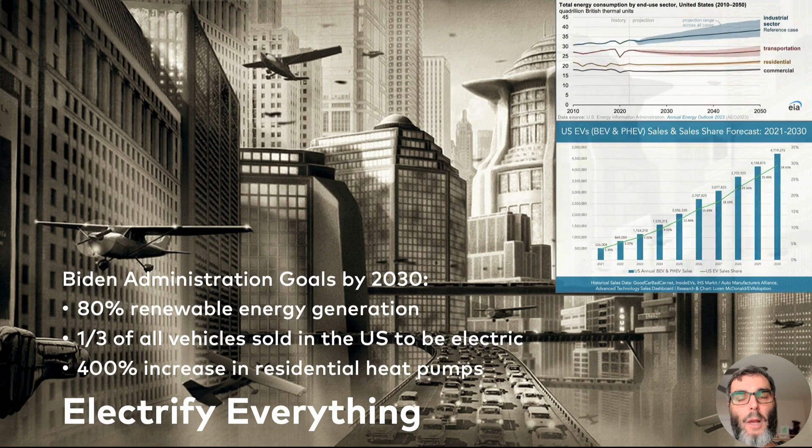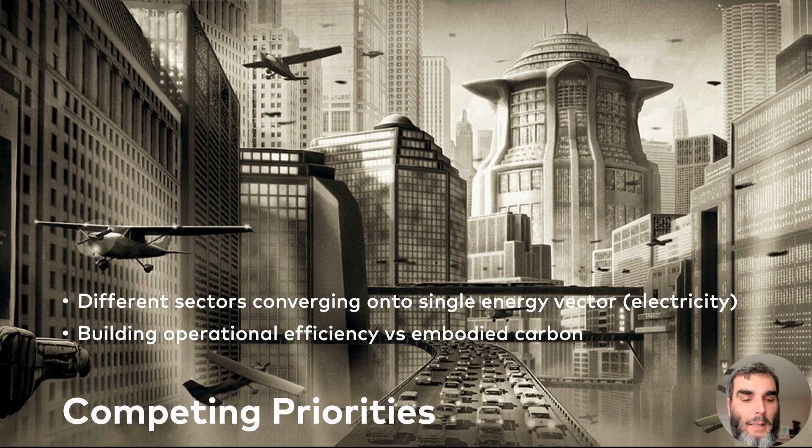And at the same time, we have some priorities that are competing with each other. We see different sectors converging to the same energy vector, that is electricity, as well as we see competition in the world of construction where embodied carbon and operational carbon seem to have conflicting priorities in trying to minimize the impact of buildings. And lastly, are buildings actually getting better with this technology?

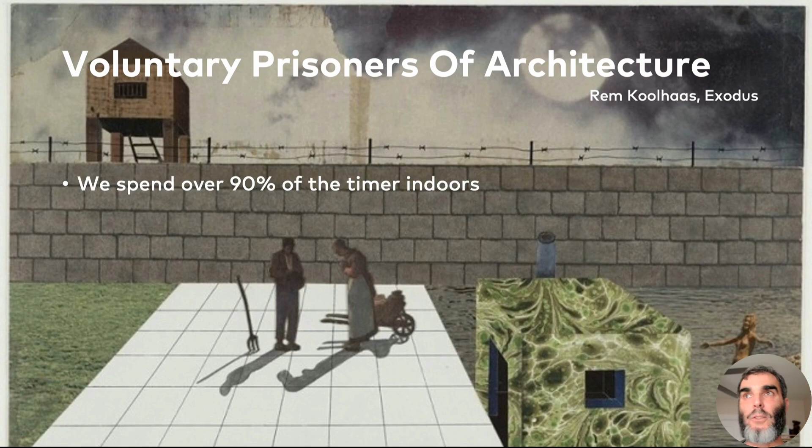So, one of my favorite quotations is from Rem Koolhaas, an architect from Holland. He used to call people voluntary prisoners of architecture. And that's because we spend 90% of our time inside buildings. And the buildings we live in naturally have a very strong impact on our health and well-being.

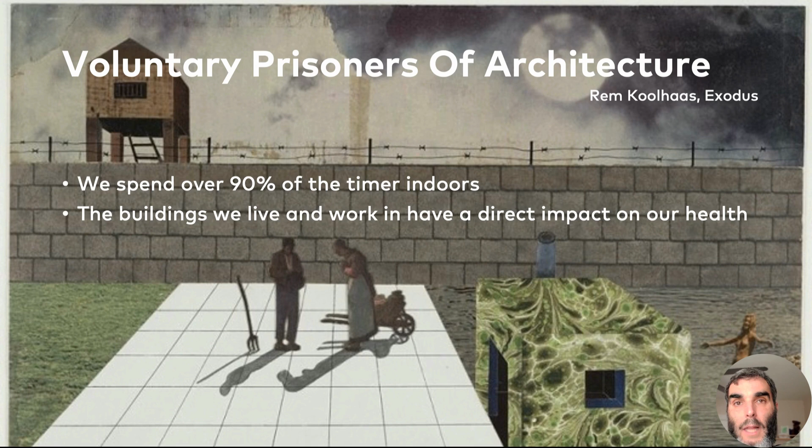That being said, this is something that we ask builders that take our training all the time. How long do you think a family stays in a house that they just moved into before they move out again? Think about that. Most builders that come and take our training think 3 years, 5 years, some think it's 7 years. And the reality is that on average, that family is going to stay in that house for 13 years before they move out again. This is the number of years that a family stays in a house today. And it has been 13 years for the past 10 years.

So this is part of the building science. If you're making recommendations to your client based on your knowledge, you should also have realistic expectations of how long they're going to be in that house before they move out again. And that number is 13 years.

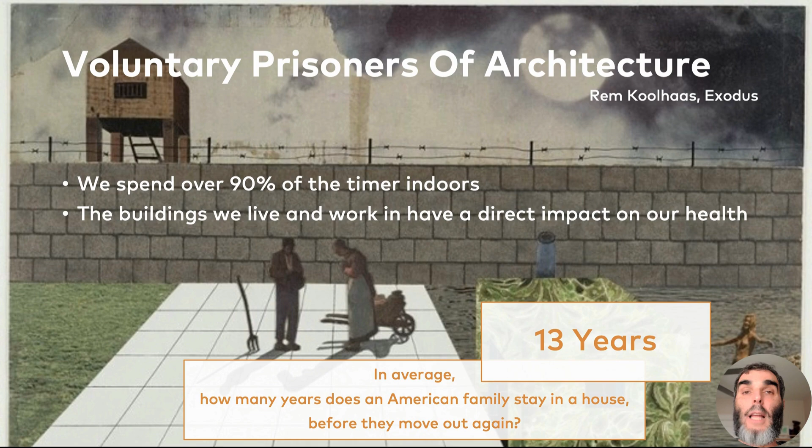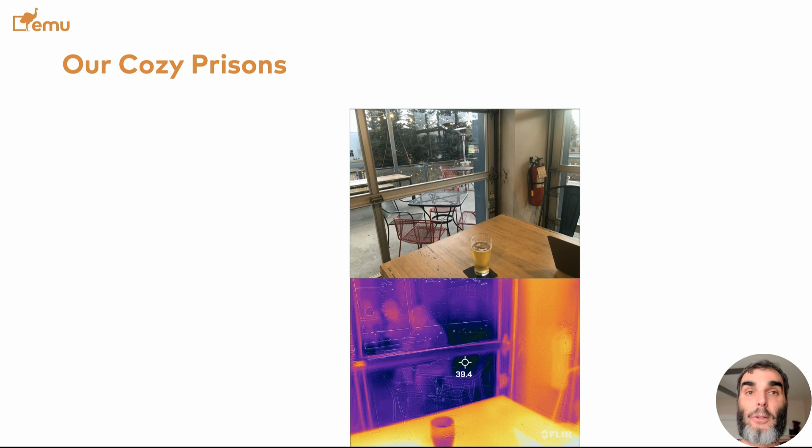And they literally lost business because I love beer and I would have had a second beer at least. But that day it was so cold that I had to go. So they lost business because the clientele was uncomfortable.

And this should not be a competition. Buildings should become healthier as they are becoming more energy efficient. That is one of the goals that we should have in any approach that we have towards buildings.

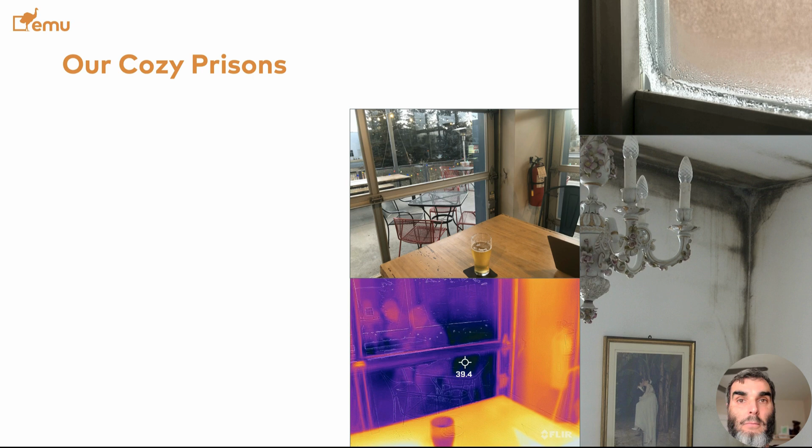So just to give you an idea how accepted it is in the US that windows are going to have condensation. Windows are going to have ice forming inside of them. This is normal for professionals designing, manufacturing, and building windows. Keep that in mind.

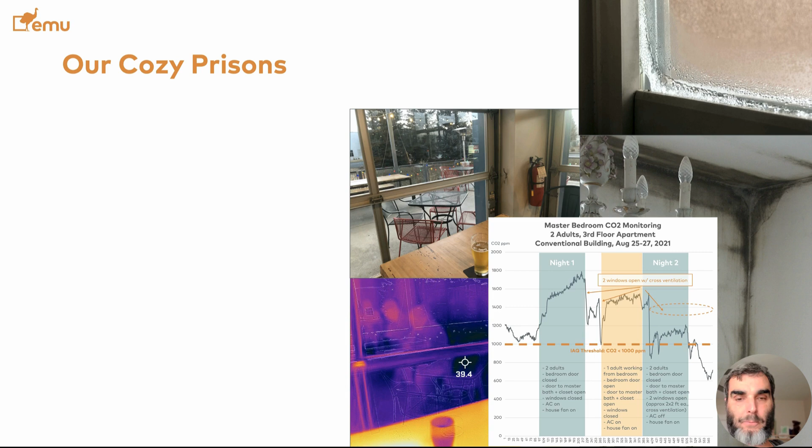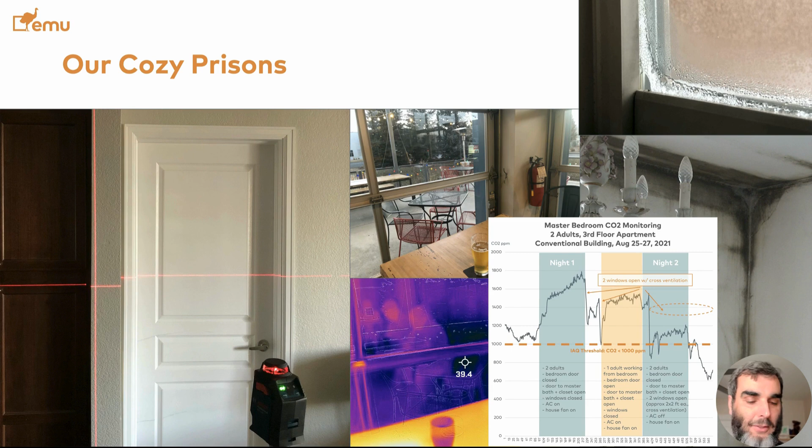And lastly, the same building, I once shot the laser level, and I found that wall on the left-hand side to be off plumb by 3/4 of an inch. So my expectations suddenly dropped, and I moved out. So that is a real-life experience of what it is to live in mainstream construction buildings today.

Now on the market we have basically two extremes. One is the worst building type that you can legally build, and that is a building built to the code minimum. That is represented here with the 2021 IECC building code minimum. And then on the other end of the spectrum at the top, we have passive house. Passive house buildings need about 80% less heating and cooling compared to regular construction. And those are the two extremes that we typically see in the market between code minimum and passive house.

Now, in between, we see a lot of better than code building, or my building is 20% better, or it's high performance. These are all definitions that oftentimes don't have a real justification because they don't actually abide by a set standard, or they don't actually have ways to measure that 20% better. It's just a number that an architect or a builder may pull out of the rear end to have a better grip on the clientele.

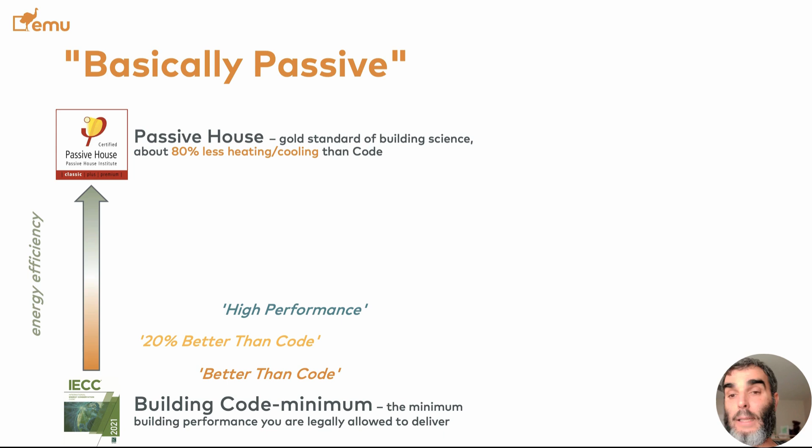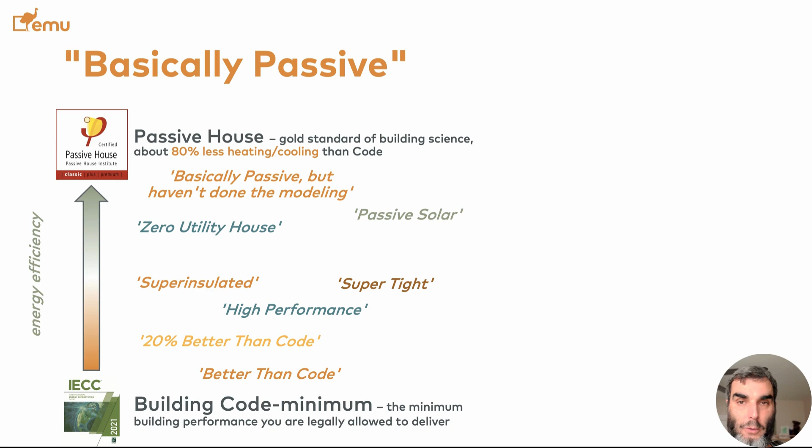We can have a super insulated building. We can have super tight, zero utility house, or questionable. It's passive solar, that is some very old concept. Or it's basically passive, but haven't done the modeling. So you have not done your homework and you don't know, really. And these we call the floaters because they float in between code minimum and passive house. And there's some risks associated with that.

To start with, the expectations are undefined. What does success look like in a conversation with your clientele if you're not defining your goals clearly? If you don't define your goals clearly, that is very, very risky in any conversation. Then you have the risk of overpromise and under-deliver, and that leads to disappointment and frustration. It can be overkill. You can end up overpaying for the amount of insulation, the type of window package that you order, or it can be under-delivered, especially in the indoor quality, but even the construction quality.

Missed moisture management, so thermal bridging, the issue with mold that we saw in the previous slide, that's an issue with moisture. And then lack of structure and guidance. What are you actually trying to do with this project? So these are all issues that we see over and over with projects that don't commit to full passive house, but they want to try to do better than code. It's very gray and fuzzy and unclear what these projects are trying to do.

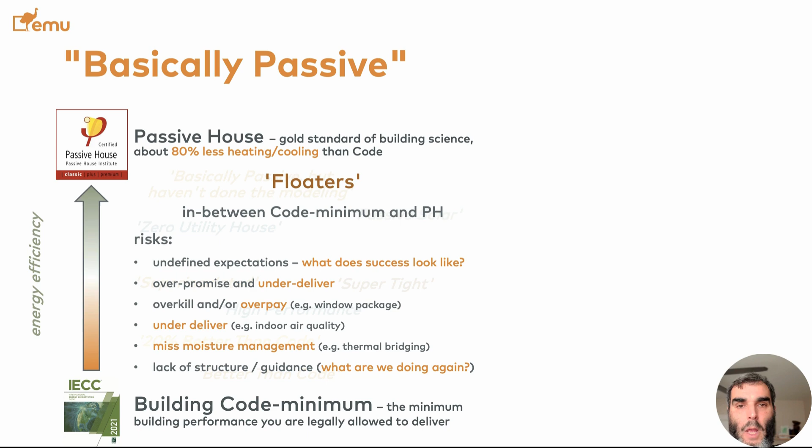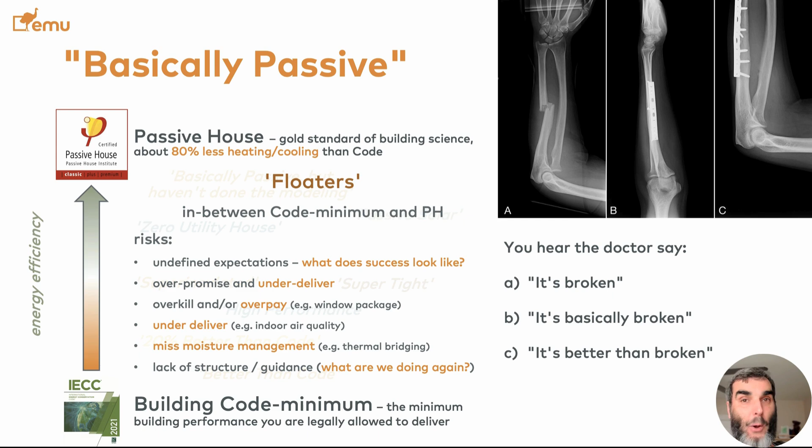Think of it as you're going to the doctor because your arm hurts and you're trying to get an answer from the doctor that is visiting you, and the doctor says it's broken, or it's basically broken, or it's better than broken. So it sounds ridiculous, but that is what construction is at right now. We want to have that diagnosis, to have a clear understanding of what's going on. And better than broken buildings are risky.

In a newly built home, what percentage of the total heat loss do you expect to see from exterior walls? Or for windows, what percentage? Do you expect the windows to be 50%, the windows to be 10%? This is windows without considering the air leakage, for example. What about air leaks for the whole house?

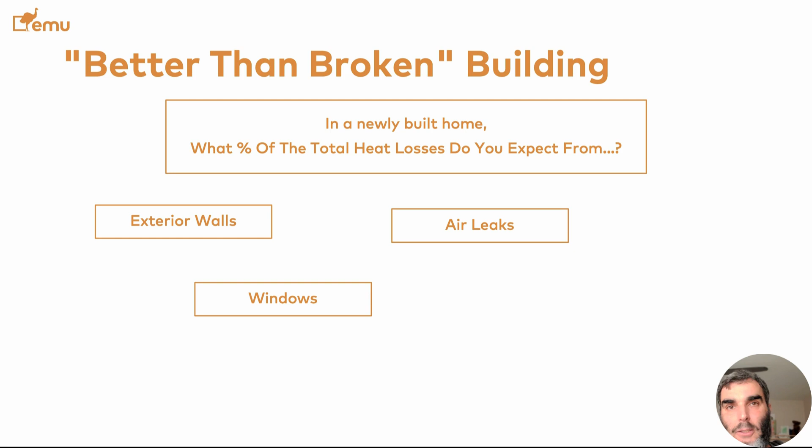That 0.6 air changes per hour that is for passive house, or 3 air changes per hour that is for code, or 1.1 air changes per hour that is for Phius projects. Is that 50% of the total heat losses? Is that 20%? Is that 15? Do you know? What about losses to the ground?

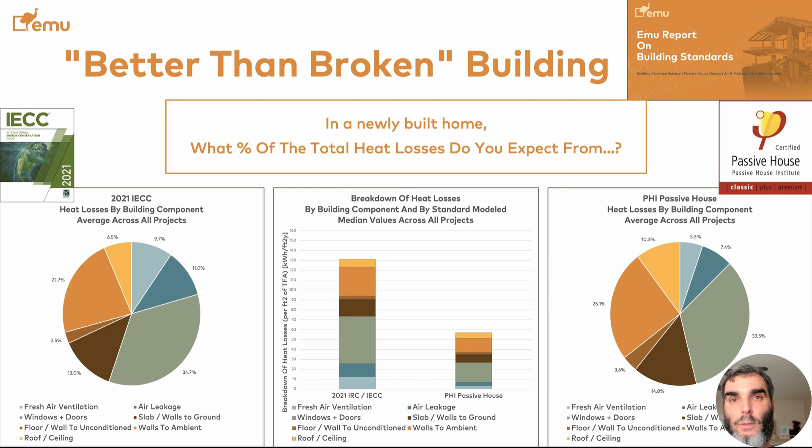Now, if we bring them to passive house, windows and exterior doors still count as the main source of heat losses. Exterior walls still count as the second one. Third is still heat losses through the ground to the outside. And then air leaks drop to number 5 in this scenario, with number 4 being, for passive house, the ceiling. Now, what is interesting is that when you compare apples to apples, passive house has a lot less heat losses in total, but the breakdown between windows versus walls versus air leaks is very similar to a code built building.

Now, informed decisions matter because every project has a limited budget, and the data that you get from an energy analysis helps you make decisions and make them based on your goals, whichever goals you may have, and whether or not you want to meet a certain green builder certification.

It's just a way to have a diagnosis, just like you go to the doctor and they tell you that your arm is broken. It's better than that than they tell you, oh, it's basically broken, but you don't actually know. So the moment you decide to spend more money, there's plenty of people that are willing to help you spend money, but you don't necessarily meet your goal that you have set for your project.

So in this scenario, we want to help you quantify how much A is better than B, and whether you do need B or if you're okay with C, whichever those A, B, and C may be. Maybe it's a higher performing window package, maybe it's more insulation in your building overall, maybe it is a heat pump. But if you don't know, if you don't have the data, then how can you make decisions? You just don't know.

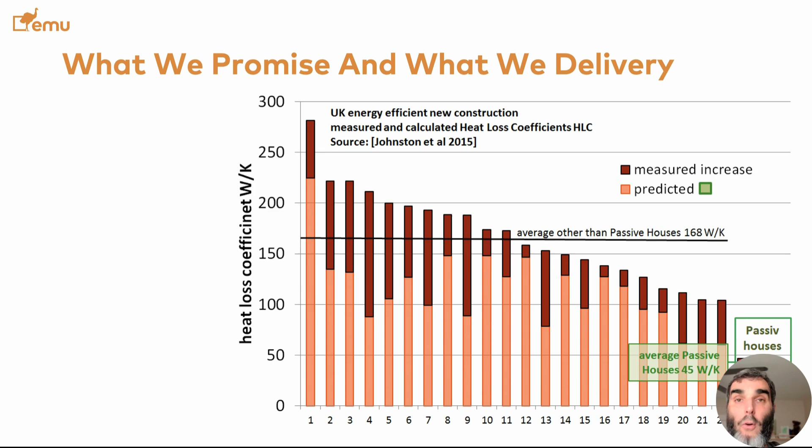What we promise and what we deliver. This is a study made in the UK where they looked at the actual performance of 25 built projects. And the pinkish columns show the expected or promised energy performance, so how much energy that building was supposed to consume for the overall operation.

And then the maroon darker red shows what the actual additional consumption was on top of the expectation, meaning that the buildings with a lot of darker red maroon columns were consuming a lot more energy than it was anticipated, and that is a sign of a performance gap. Performance gap is the gap between what you promise and what you actually deliver, and that is very common for code built buildings and even the floaters, projects that are built in between code minimum and passive house.

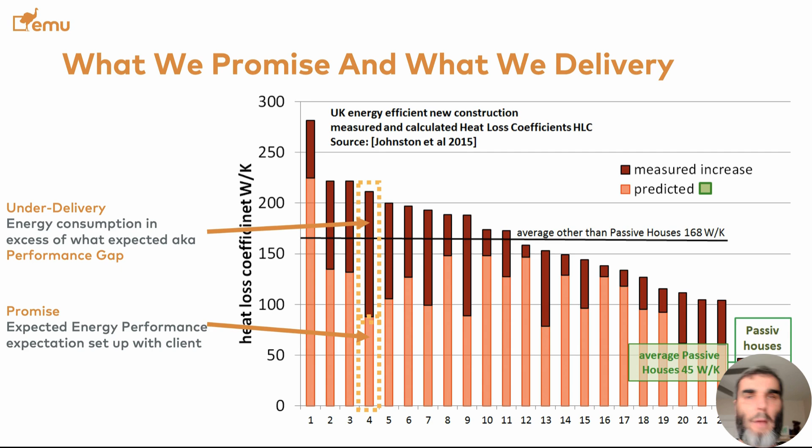If you don't have a very clear expectation, if you just say, "Oh, my building is super tight," my building is 20% better than code. You just don't know. And your building is doomed to be consuming more energy than what you expected and more energy than your client actually expects.

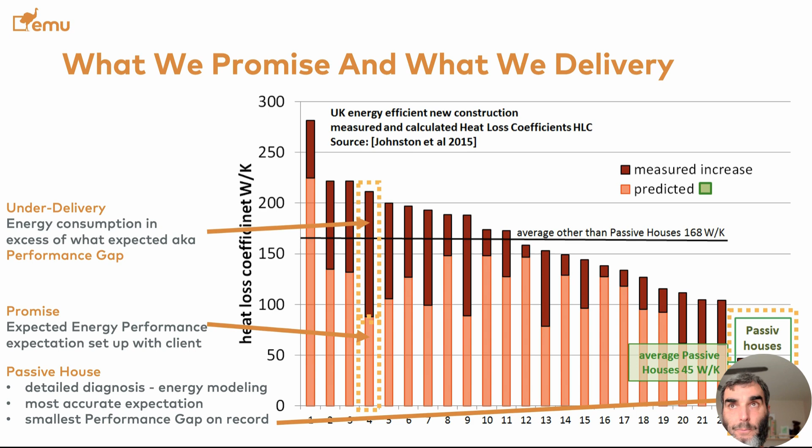Now, in this scenario, in the UK, they found that the buildings that were not only consuming the least energy, but also were being more predictable in how much energy they would actually consume were passive house projects. So passive house in this case not only helps you deliver a very high performance building to your clients, it's also a way to have a very dependable promise that you can deliver on to your client.

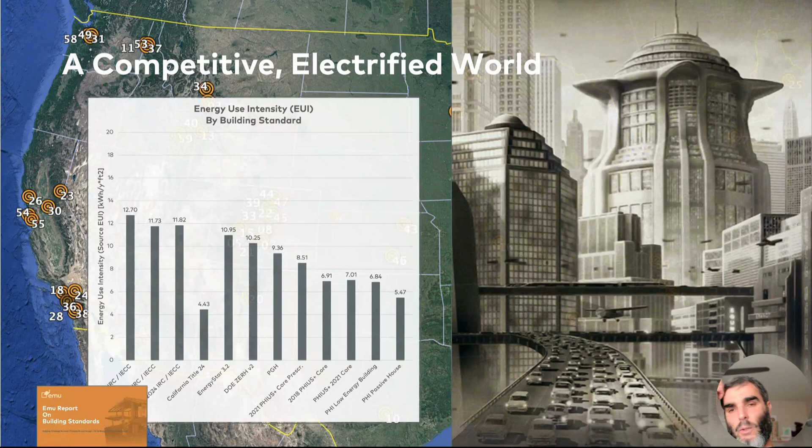This is the map showing the 50 projects that we analyzed and studied in the report I mentioned. And the study that we found was that once you start considering adding electric cars to the mix, you can have either a code built house or you can have a passive house and charge two electric vehicles for the same amount of energy that it takes to operate a code built building without charging any cars.

So that is a pretty informative piece of information, because if we look 5-10 years down the line what is coming, the buildings that we are building today are still going to be there, most of them, and we are going to be in an economy where electric vehicles are going to be common and commonly charged at home, and energy is not going to be cheaper.

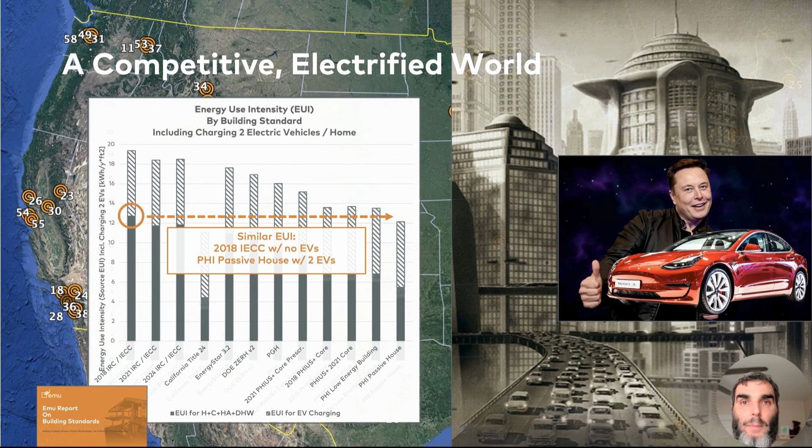So building your building to the passive house level, or offering passive house to your clients, is a way to future proof those projects and those buildings for an economy where electric vehicles are going to be much more common and charged at home.

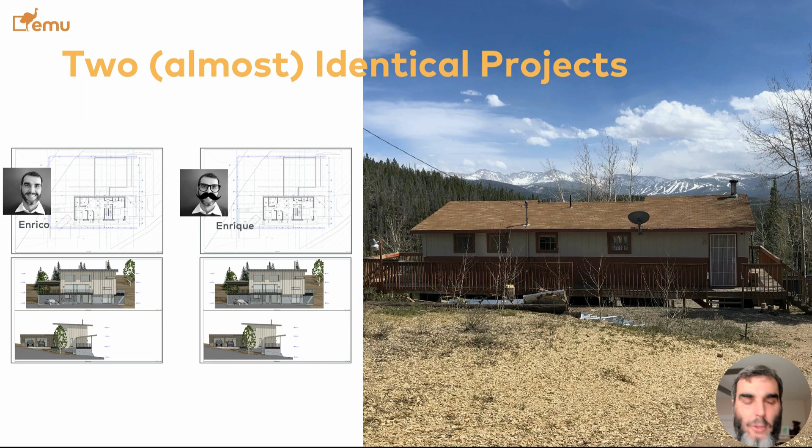So they have identical projects. This is my house up in the mountains, and I moved it to Boulder, Colorado for this experiment. But they basically have the same set of blueprints. They're just contracted to build. Enrico is contracted to build it to the actual passive house standard, and Enrique is just contracted to build passive house like, but without actual follow up on that.

And I moved the project to Boulder, Colorado, because this is a presentation I gave for the Natural Building Alliance conference in Boulder. Plus, Boulder is climate zone 5. It's more middle of the road climate compared to the actual location of this project that is at 8,800 feet of elevation in the mountains of Colorado.

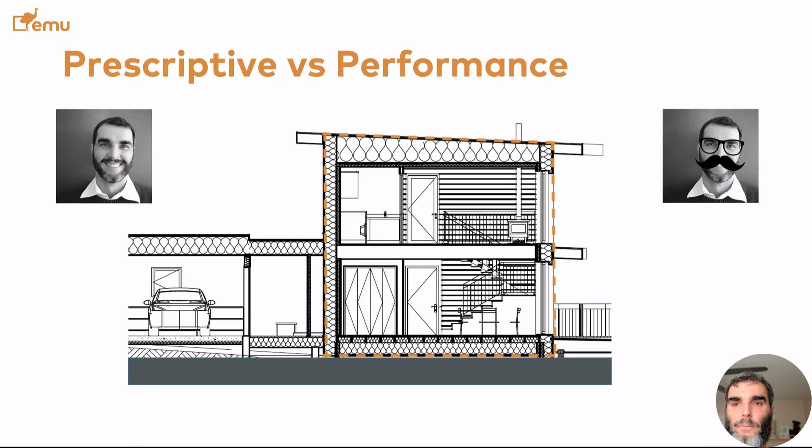So Enrico has a performance-based standard using the low energy building code, whereas Enrique uses the Phius prescriptive. In the study I mentioned, we compared these two standards pretty closely because we wanted to investigate the advantages of using a prescriptive approach versus the advantages of using a performance-based approach. So I'm going to have a slide towards the end where I can show a QR code where you can download the actual report and look at the results.

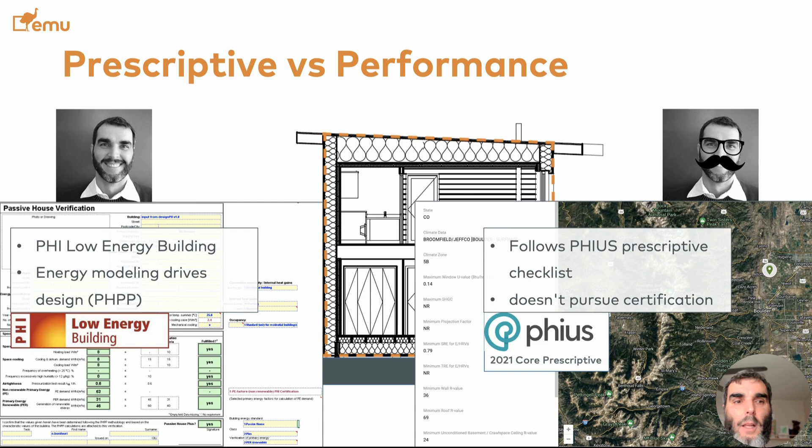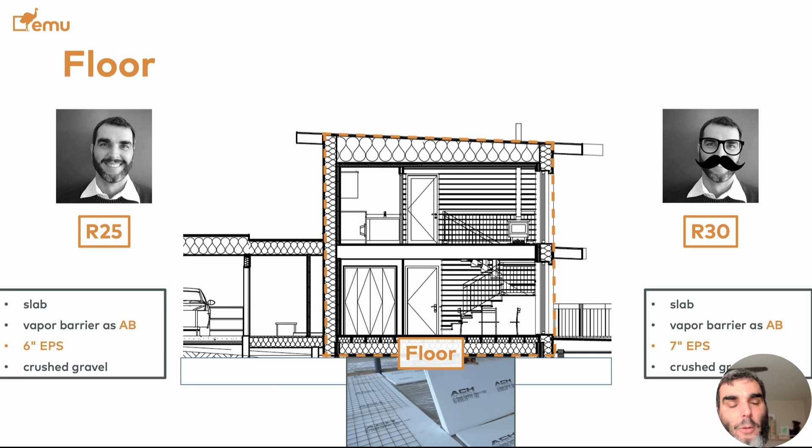So for the floor, we started off with 7 inches of EPS for Enrique, whereas Enrico had 6 inches. This is because Enrico was using the PHI low energy building, which is a performance-based approach. So he was able to shave off some insulation there and save some money, as well as saving some embodied carbon, for example. For the exterior walls, Enrique used 6 inches of mineral wool exterior insulation and an R20 dense pack cellulose in the 2x6 stud cavity framing.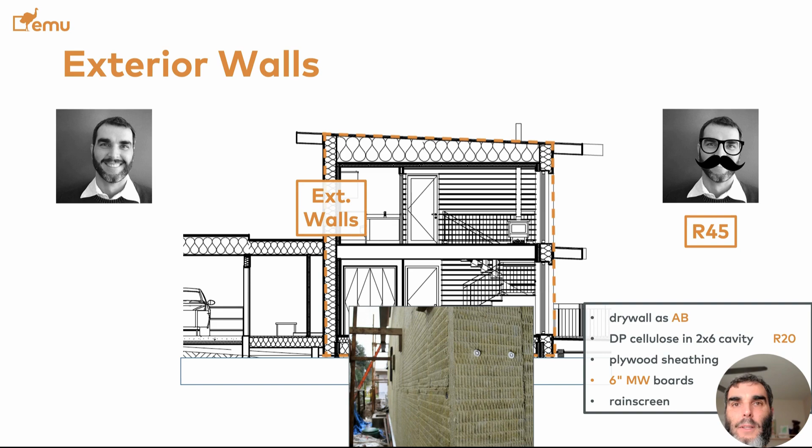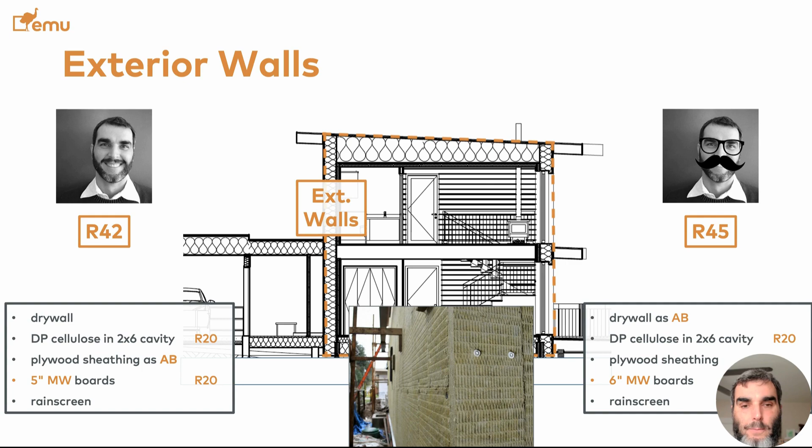Whereas Enrico on the left-hand side was still using the performance-based approach, so was able to shave off an inch of mineral wool, so he was getting to the same energy performance, but using a little bit less insulation. Then for the roof, Enrique was following the Phius prescriptive checklist using 24 inches of fiberglass loose fill, whereas Enrico was doing a few inches less because through the energy analysis that he was using with the performance approach, he was able to navigate the diminishing returns of using so much insulation. And so he decided to choose 21 inches instead of 24, which is what Enrique did. Enrique was using just the checklist, so didn't have a chance to see how much the diminishing returns were impacting his projects.

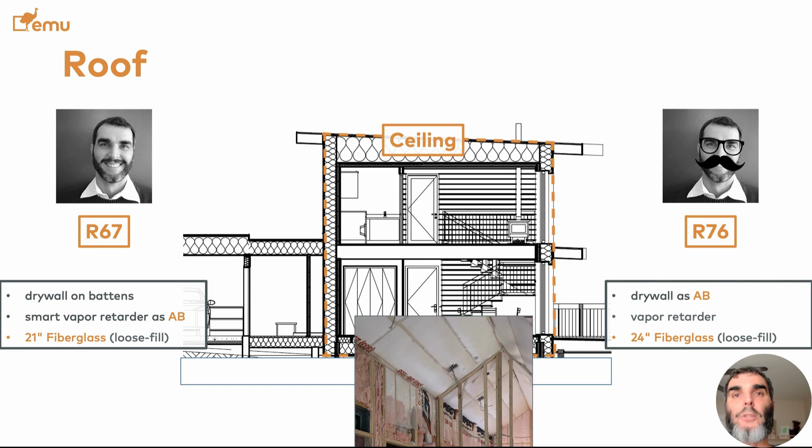Then looking at windows and doors, Enrique used a phC-grade frame with skinny triple pane. So the skinny triple pane is a glass that is a triple pane that measures 1 inch from the exterior face of the glass to the interior face of the glass, and low gains glass because he was concerned about overheating in the summertime. Plus, without the energy model, you don't actually have a way to see how much low or high gains glass actually impacts your buildings. And Boulder, Colorado is in a heating dominated climate, but Enrique had no way to verify how much passive solar gains actually matter because he didn't have an energy analysis. He was just following the Phius prescriptive checklist.

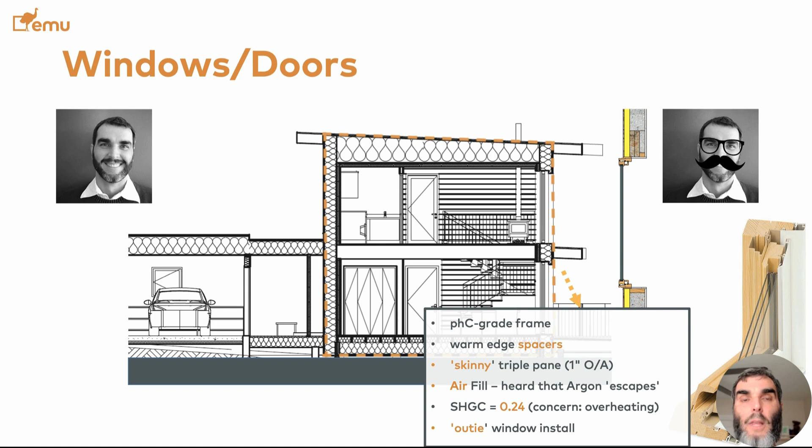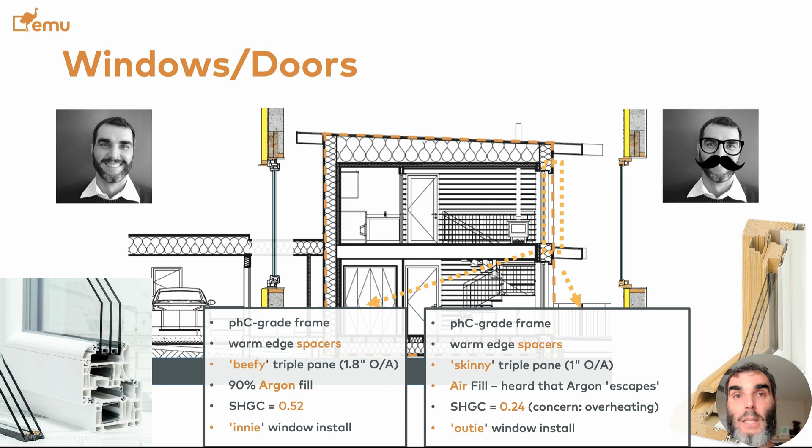Enrico, on the other hand, was using beefy triple pane, so a triple pane glass that measures almost twice as much in thickness of the glass. This is not the glass pane itself, it's the pockets inside that are thicker, because that is a way to optimize the performance of the argon gas fill. And with the support of the energy analysis, Enrico was able to optimize the passive solar gains for his building for his climate. So that is why we see a solar heat gain coefficient of 0.52, which means that glass lets about 50% of the energy from the sun through the glass to the inside, whereas the low gains glass from Enrique on the right hand side only lets in about 0.24, so about 24% of that total energy. This is a game changer in the way to assess the energy performance, and you need the energy analysis or the energy model to actually be able to see how your building captures that sun and how that performs in wintertime versus summertime.

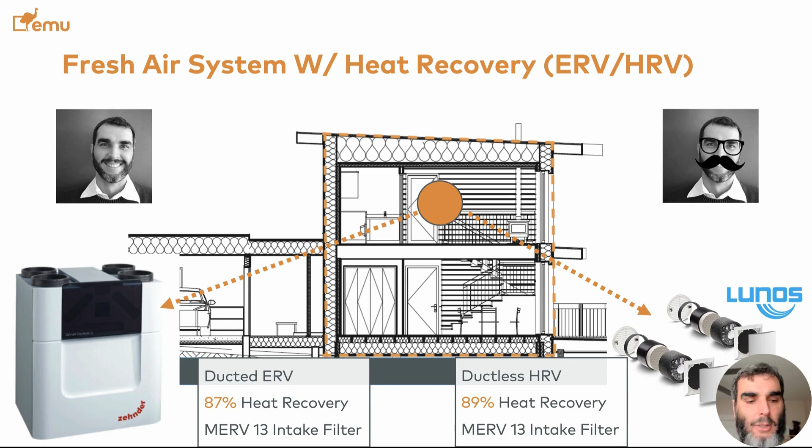Then looking at the fresh air ventilation system with heat recovery, ERV and HRV, Enrico was using a Passive House certified 87% heat recovery centralized unit, as opposed to Enrique, who was using a decentralized heat recovery ventilation room by room with a label recovery rate of 89%. We're going to see what that looks like in a sec. The air barrier strategy, both of them wanted to get below 0.6.

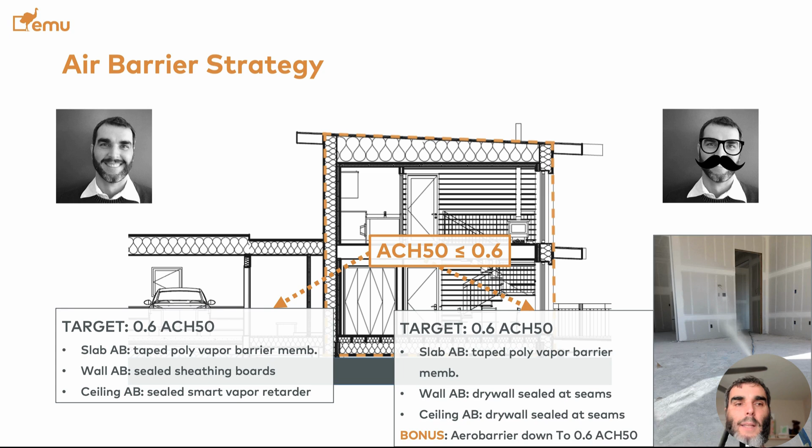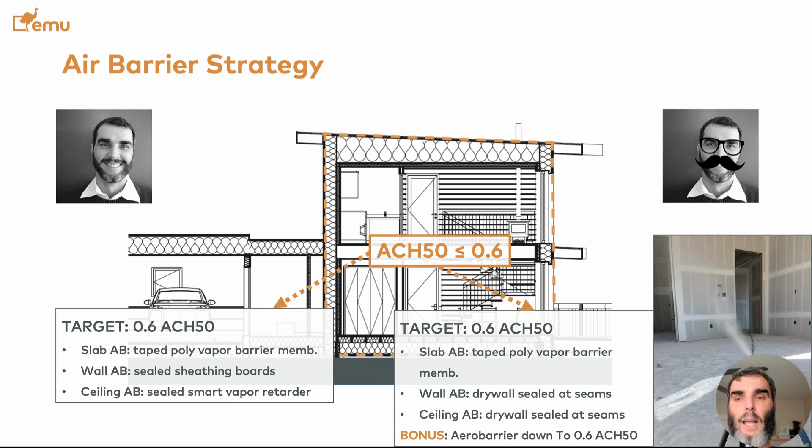Enrico used the taped vapor barrier polyethylene membrane under the slab as the air barrier at the slab, connected that to the sheathing at the walls, and then the smart vapor retarder on the underside of the ceiling at the roof. Whereas Enrique used drywall for the air barrier both at the wall and at the ceiling, as well as used AeroBarrier, which is a nebulized caulking agent, to air seal down to 0.6 to get to that airtightness level. So different air barrier strategy. We're gonna see a little bit of how that performs.

It's time to build. Did the blower door test. Got to 0.6. Got to 0.6. Yay! We hit the finish line. The performance value seems the same. Enrico on the left-hand side was pursuing the PHI low energy building certification with the International Passive House Institute, whereas Enrique on the right-hand side was using the Phius prescriptive approach. If you want to look at more comparison between these two standards, please download the report. There's going to be a QR code at the end of this presentation to get that download page.

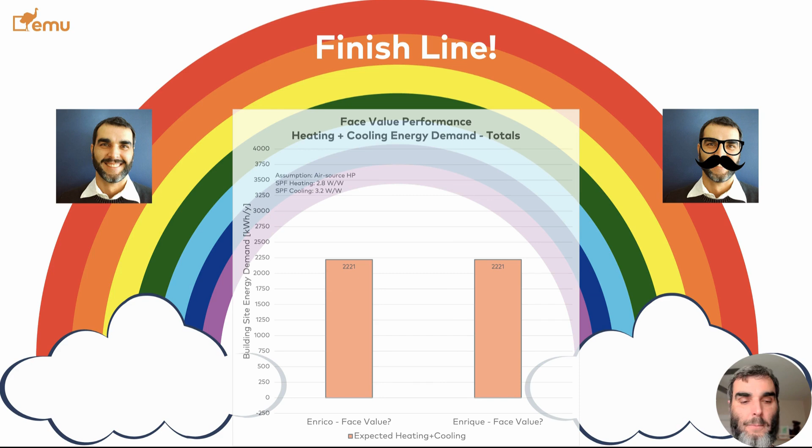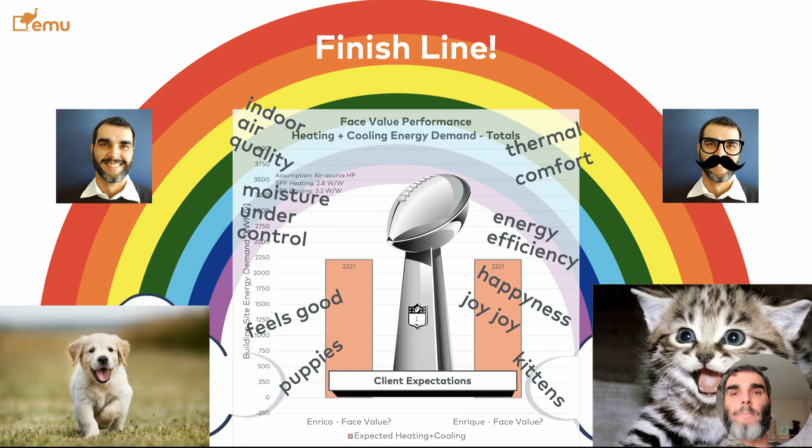So at face value, both projects meet the same operational performance. We get to the client expectation, we have indoor air quality, we have thermal comfort, moisture is under control, energy efficiency feels good, happy, happy, joy, joy, puppies and kittens. Yay, it's good when projects end up well like that. The bill, by face value, they were supposed to have similar performance.

Enrico spent about $3,500 in energy modeling fees, which led him to using an R25 at the slab, R40 at the walls, and R67 at the ceiling. Enrique, on the other hand, used a prescriptive approach, meaning $0 for the energy modeling. Used the PHIUS prescriptive checklist with R30 at the slab, R45 at the walls, and R76 at the ceiling. That led Enrique, because of this checklist, to using about 600 cubic feet extra insulation, leading to about $7,000 more cost of the insulation.

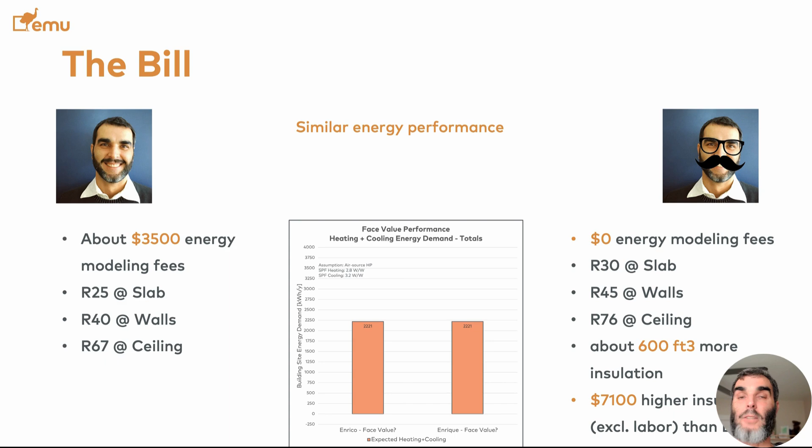So if you look at just the cost of the insulation that Enrique had, it is about twice as much as the energy analysis that Enrico had on the left-hand side to get to the same energy performance. So this is where it's important to have a clear understanding about what you're trying to do. If the energy analysis only looks like an expense, maybe you're not considering all the pieces that are involved. Because if you're looking at just a prescriptive checklist, you end up typically spending a lot more money in insulation to get to the same energy performance, and you don't actually know whether or not you are going to get to that energy performance because you don't actually have an energy analysis or an energy model to do that guidance for you.

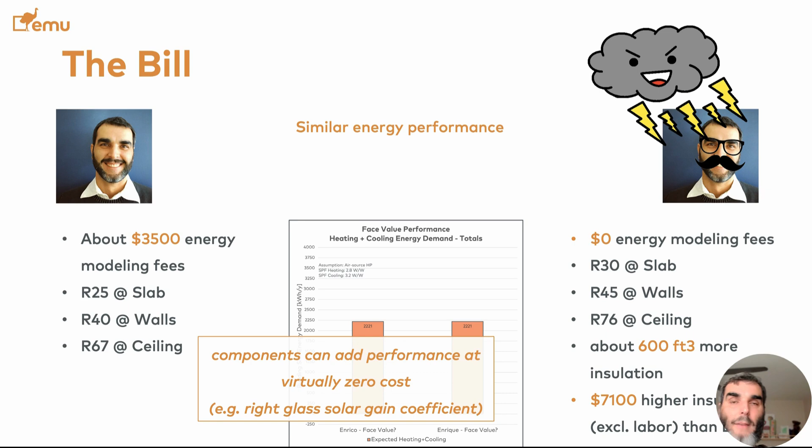So the energy analysis basically pays for itself once you factor these in. And the additional energy performance Enrico was able to exploit was the actual optimization for how the building performs on that site in the climate. Enrico was able to optimize the coating on the glass so that it would let in the right amount of energy during the wintertime for that climate without causing overheating in the summertime. And without the energy model, you don't get to do that. So if you actually want to get to a higher energy performance level, you need to accept that you're going to have an energy analysis done for your project.

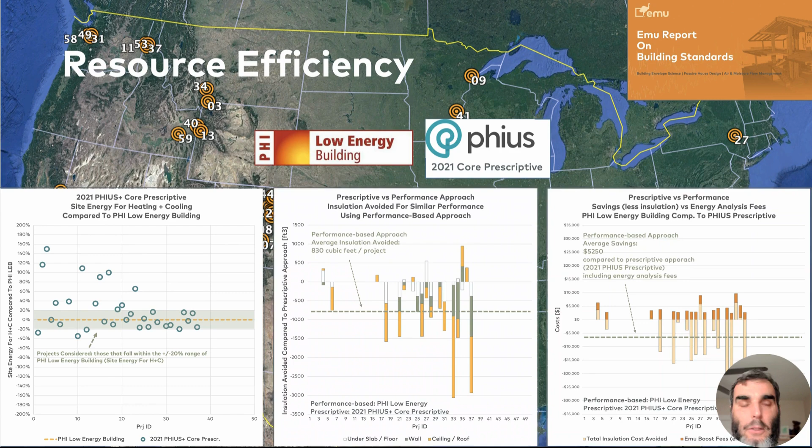Resource efficiency, this is what we covered just now. This is covered in depth in the report. Again, at the end of this presentation, there's going to be a QR code for that report download.

Now, that was just the upfront cost. The energy performance, in theory, on paper, is the same. However, over time, or actually day one, once the occupants move in, Enrique finds out that their actual energy consumption is much higher than what he was anticipating, about two-thirds higher. Why is that? This is the performance gap that we covered earlier in this presentation, looking at the study from the UK.

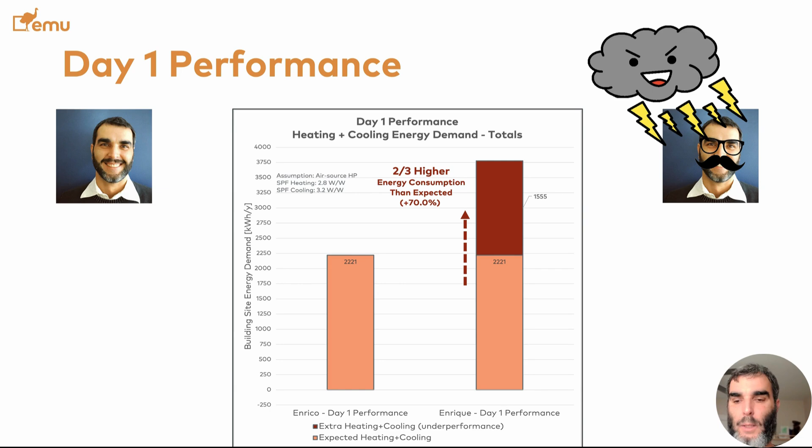So, and also Enrique starts looking at... Enrique is my evil twin. People call me Enrique all the time. You know what? You're gonna get the evil twin if you call me Enrique.

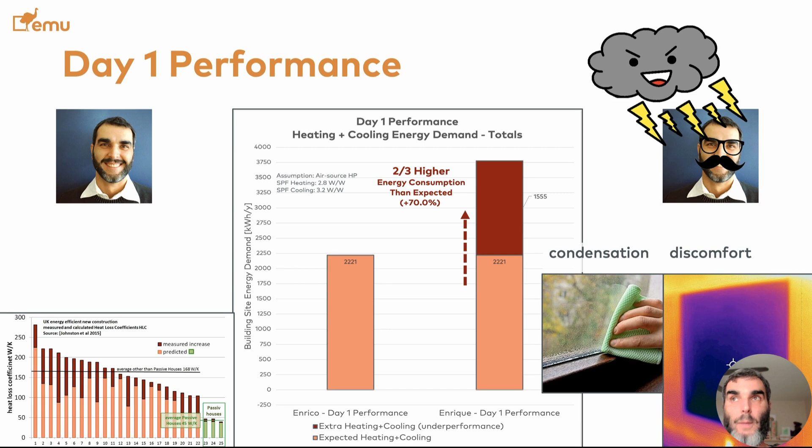So Enrique also gets condensation inside of his windows, and clients are clearly not happy, as well as it's very uncomfortable because there are some issues with interior temperatures and windows. Why is that? The C word, condensation. How much moisture does a family of four generate in a house over a typical day?

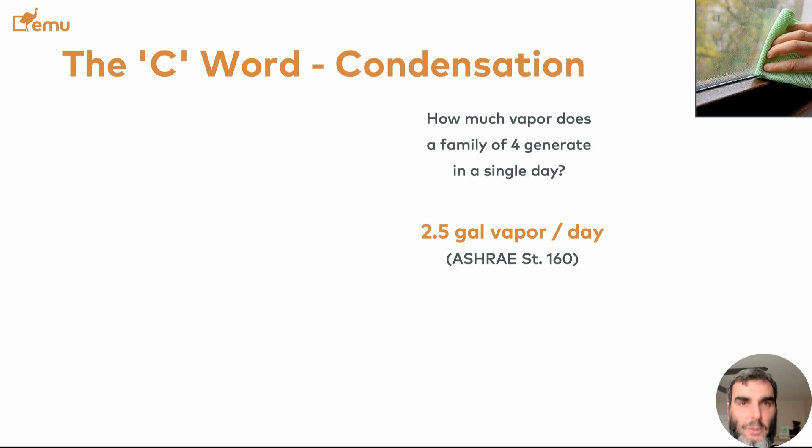Do you know? It's about 2.5 gallons per day. So it's a lot of moisture that we generate by breathing, taking showers, cooking. If we have pets, we generate a lot of moisture. And then moisture goes somewhere.

Enrique used Google a lot, so he used a detail that he found on the internet, which had a metal sill pan under the sills of all of his doors and windows, which is a big thermal bridge. If you look at the isotherms, you have a big thermal bridge under the window through that metal, which opens the ground for condensation. This is just science.

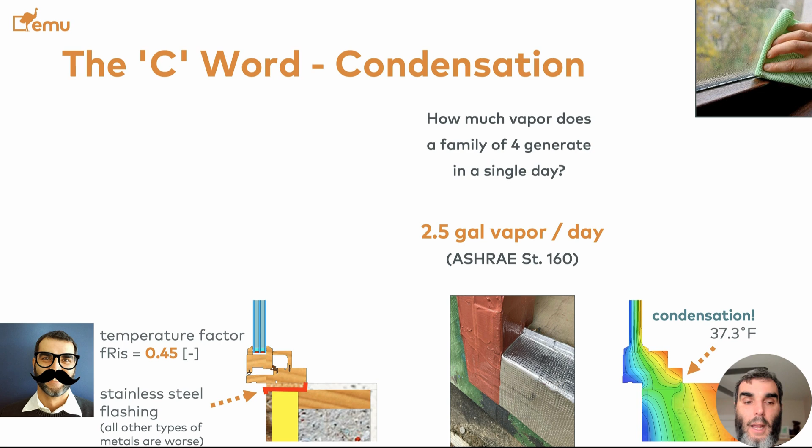If you look at details on Instagram, and if you think this metal sill pan is a good detail, try to ask if they have ever done a thermal bridge analysis of the detail to assess the risk for condensation. Because condensation happens, condensation takes no prisoners.

Enrico, on the other hand, had a similar flashing detail but using tape flashing, so no metal flashing under the windowsill. He had some flashing details exterior to the window to protect the insulation, to protect the tape flashing, but no metal was coming in under the window, meaning that we get no condensation. This is just science. This is just what we know about moisture management. So this is where Enrique was getting condensation.

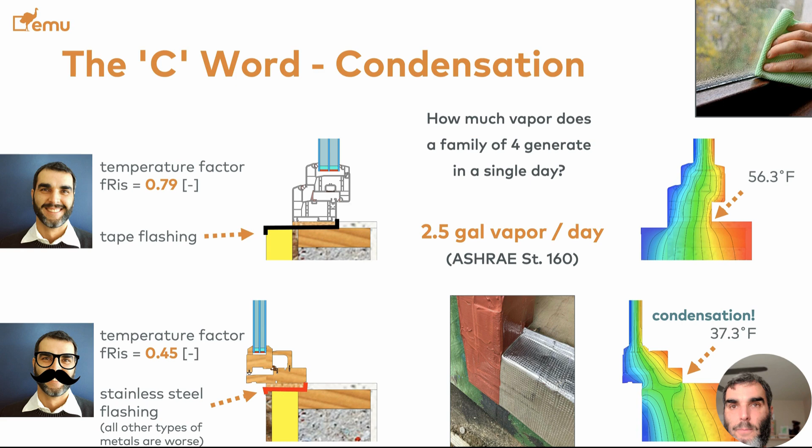For thermal comfort, in theory, both of them use triple pane windows. So what happened? What happened is that Enrico used beefy triple pane. We're going to see what that means in a second. Argon-filled, so there's argon gas inside the glass unit that provides better insulation than just air. There's some low-E coating, and then it's an innie install, meaning that the window Enrico installs is in the middle of the wall, which is lined up with the center of the insulation of that wall.

As opposed to Enrique, on the right-hand side, who used a skinny triple pane. We're going to see what that means in a second. The glass units that Enrique chose are filled with air because Enrique was afraid of the argon gas escaping, meaning that insulative property would be gone. But that insulates less. And then it's a more traditional outie install, all the way to the outside.

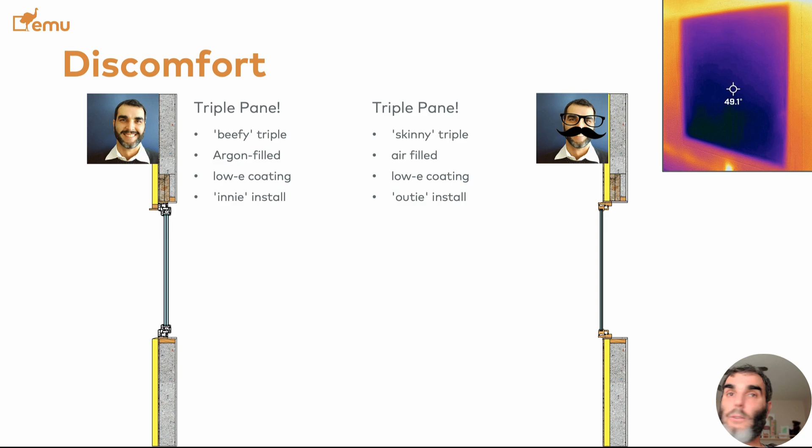That has consequences as far as thermal comfort, because if you look on the left-hand side, the window of Enrico is lined up on the center of the isotherms. The isotherms are the black lines that run along the walls, along the rainbow, so to speak, and they represent lines of the same temperature. And isotherms want to go straight and easy, just like an old guy walking to the post office. And if you center your window in the middle of the wall, these isotherms are going to have an easy time going straight, slowly, and they're going to be happy, meaning that there's going to be less thermal bridging and less heat losses.

Whereas on the right-hand side, you see Enrique's install with the isotherm view, and the window installed all the way to the outside, to the left-hand side of his wall assembly, meaning that his wall isotherms have to walk all the way to the left to get into the window, into the glass unit, and then back all the way to the right to get back into the wall insulation. And the more left and right your isotherms have to do, the less happy they are, and the more issues you're going to have with thermal bridging, and the more performance you're going to lose along the way. This is part of what happened in this case with Enrique's window and Enrique's discomfort issue.

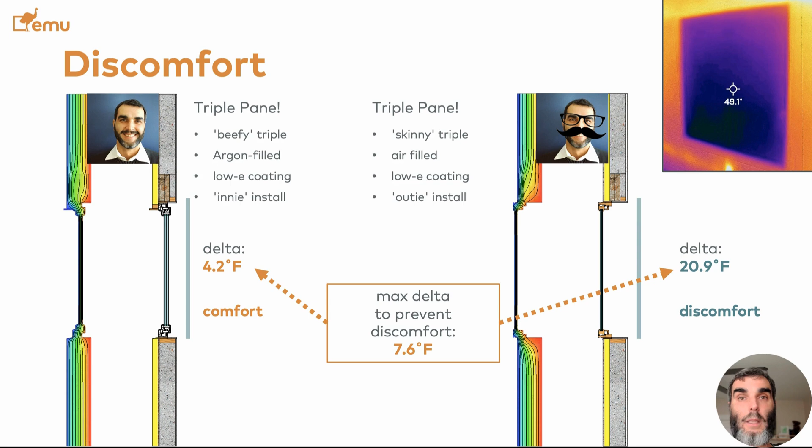So this is part of the passive house standard. In order to have thermal comfort, the delta between your average window surface temperature and your room average has to be less than 7.6 degrees. And if you have less than 7.6 degrees, then you have an even temperature level, and so you feel comfortable. And if you don't, if your delta is greater, as in the case of Enrique's window here on the right-hand side, where it's almost 21 degrees delta, almost 3 times the maximum delta, then you're going to be uncomfortable because your body senses that one side of the room is a lot colder than the rest of the room. That is the science of thermal comfort.

This is a study from the report. It shows the average of those temperatures. I don't want to spend too much time on this today, but it shows very sadly that even the newest energy code, the 2024 energy code, at the time this report was done was just a draft. That draft did not account for thermal comfort at all.

So in 2027, when the 2024 energy code is going to be the standard, buildings are still going to be uncomfortable because thermal comfort is not the reason windows are specified in code minimum buildings. So just one more reason why you should not stick to a code minimum build for your project.

Then looking at beefy and skinny triple pane glass, the left-hand side shows a section drawing of the window that Enrico chose at the top, as opposed to Enrique's window at the bottom. And you see each drawing shows the width of the glass unit, and by our own labeling, this is beefy and skinny, something that EMU came up with, just to give you an idea about how important the thickness of the glass unit is.

The beefy glass that Enrico uses measures 1.8 inches, almost 2 inches, from the exterior face of the exterior pane to the interior face of the interior pane. And it's not the thicknesses of the panes of glass themselves that matter. Those are typically about 1/8 of an inch each. It's the thickness of the pocket that matters, because that pocket can be optimized for the type of air fill or gas fill that you have to maximize the insulation that you get. And that is very, very important.

And oftentimes, a mainstream manufacturer gives you the option of going triple pane glass. You say, oh, I'm having a good window, it's triple pane. And actually, the number of panes matters little if your overall unit is only 1 inch thick or less, which is what Enrique had at the bottom. So Enrique's window is mounted on a regular outswing frame.

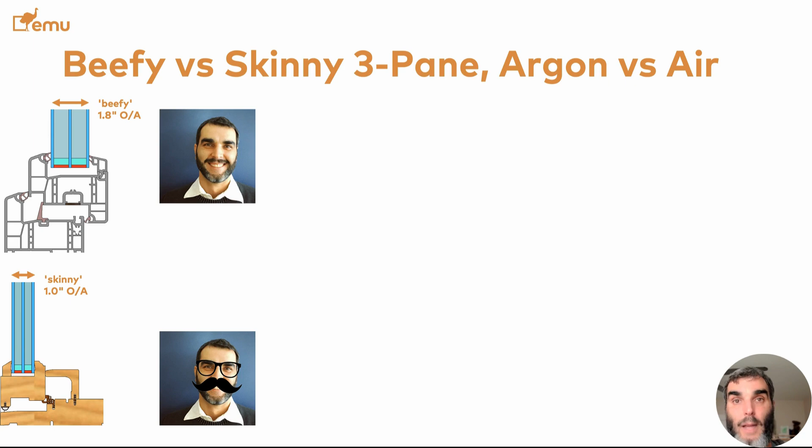Keep in mind that whichever energy performance standard you're following, code minimum or passive house, windows and exterior doors count for over a third of those heat losses. You have windows because you want daylight or want to see outside. So having good quality glass is kind of key to getting to your goals. And it's also very expensive. So you want to be careful not to buy triple pane and then get half the R value just because it's a skinny triple pane. This is very important just to get the value that you're paying for.

Now, this big difference in R value is partially due to the skinniness or beefiness, very building science language here, of the glass, and also partially to the fill of the glass unit with argon or air. We're going to see that in just a sec.

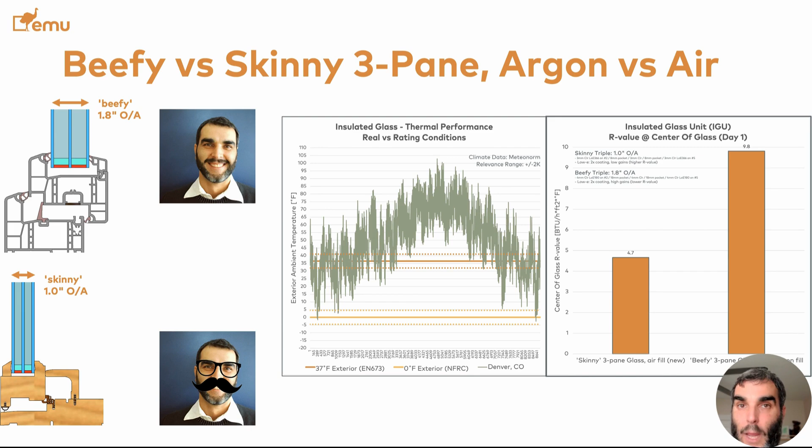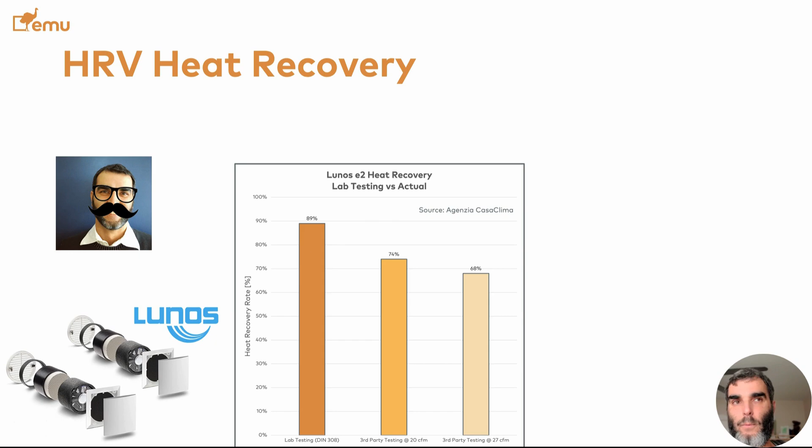Talking about heat recovery, Enrique had chosen a decentralized through-the-wall heat recovery unit. They have a certification according to a German standard for about 89 or 90% heat recovery. But actually, German standards oftentimes have their own flaws, and Italians love to point it out. I may know one guy that likes to point it out.

And once you start looking at third-party data for how these units actually perform, you cannot really expect 90% heat recovery. It is more about this data.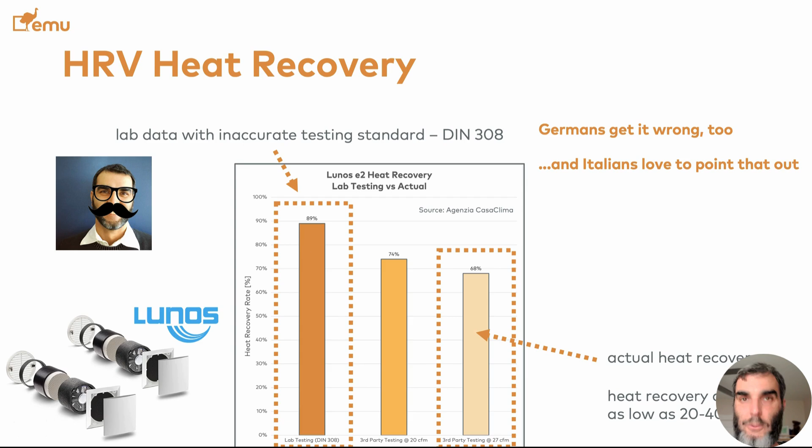What about indoor air quality? We have the case of mold. I talked about the CO2 level, and with a centralized unit like Enrico installed, that needs to be calibrated, because you need to make sure that each room has a design ventilation rate for the supply or extraction, and that needs to be met in the field. So you need to go around and measure the airflow that comes out of that ERV.

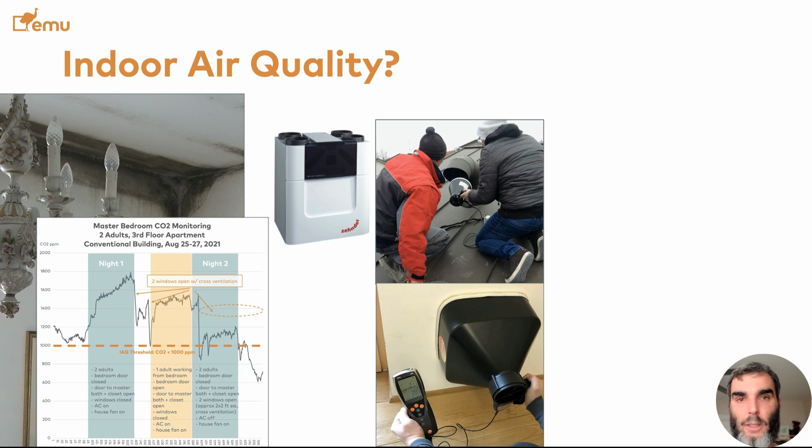This is a study made in Colorado a few years ago, and what they found is that in the passive house that was actually certified, the indoor air quality was pretty good. The passive house-like but not certified homes that they tested, the air quality was all over the place. Some were good, some were very bad, and the ones that were very bad had bought the ERV, they had paid the consultant to do the job, but nobody had commissioned the ventilation system, so they were not actually getting the air quality

that they had paid for. So something to keep in mind, because these are technologies that are not that complicated, but a lot of installers locally don't have much experience with that. So again, you may pay the premium, but you may not get the quality that you paid for.

So this is the one passive house that was certified. The indoor air quality was very good. And then these are the passive house-like buildings where about half of them had good indoor air quality and the other half had very bad indoor air quality because the fresh air ventilation system, the ERV, was not commissioned. So some rooms did not receive any air, some rooms received too much air, so the air quality was not great.

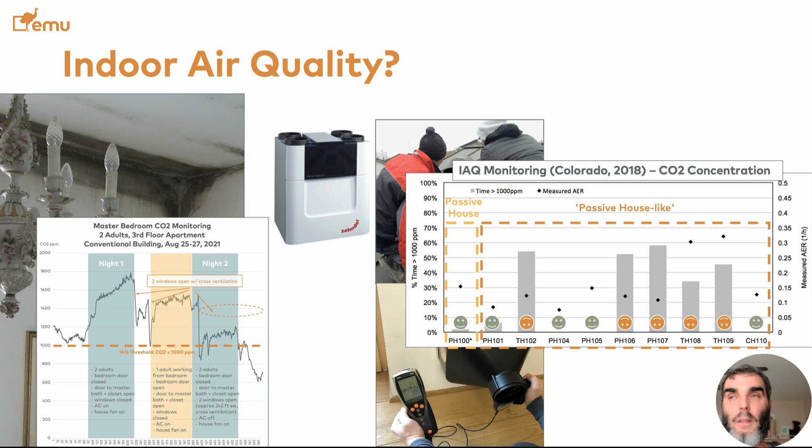So performance that ages: keep in mind that, as I said earlier, a family will stay in the house on average for 13 years before they move out. This piece of information comes from the National Association of Home Builders, not from PHI or PHIUS, who don't typically want to push for improvement or change in the quality of buildings. They just do a market analysis.

So looking at losses of gas in the glass units, we said how Enrico chose to have argon-filled glass units to have the better performance, as opposed to Enrique. Enrique chose air-filled glass units because he heard on the internet that argon gas escapes after just a few years, so why bother? The column chart shows on the left-hand side that the skinny triple pane that Enrique has stays pretty much the same over time

at about 4.7 center of glass R value, as opposed to Enrico on the right-hand side, which starts from a center of glass R value of 9.8, and over time, their glass units do lose a little bit of gas. It is standard for the argon to escape about 1% per year, starting at 90% when the glass unit is brand new. So after 13 years, 90% minus 13% is about 77%.

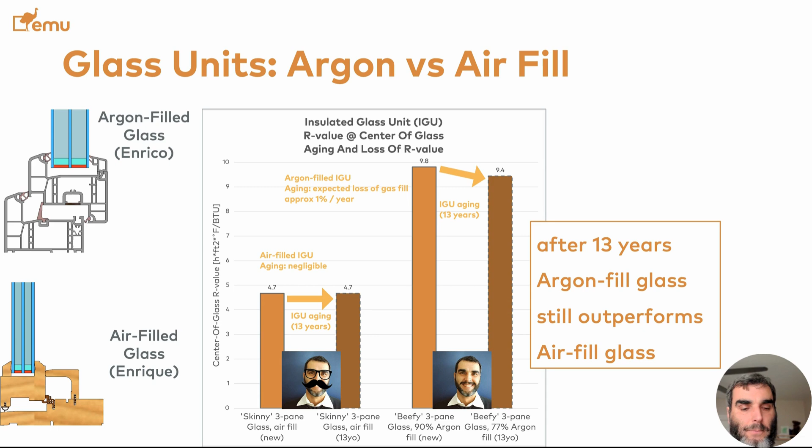So yes, there is a little bit of performance loss, but it is very negligible compared to the additional performance you get by filling your glass units with gas. It would be similar with krypton; we just didn't cover krypton in this slide.

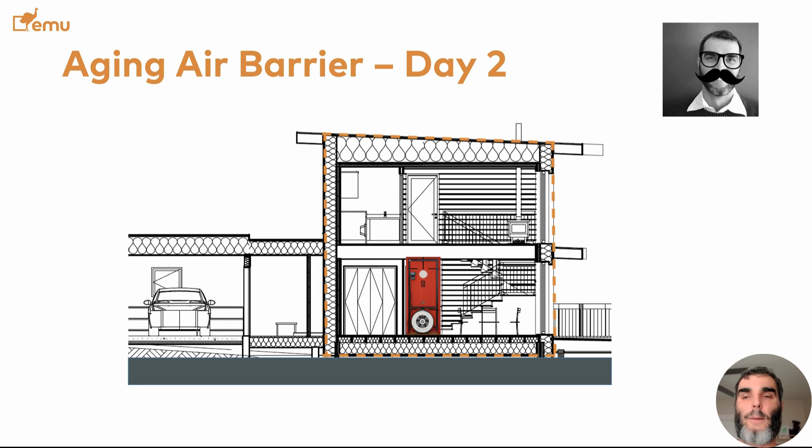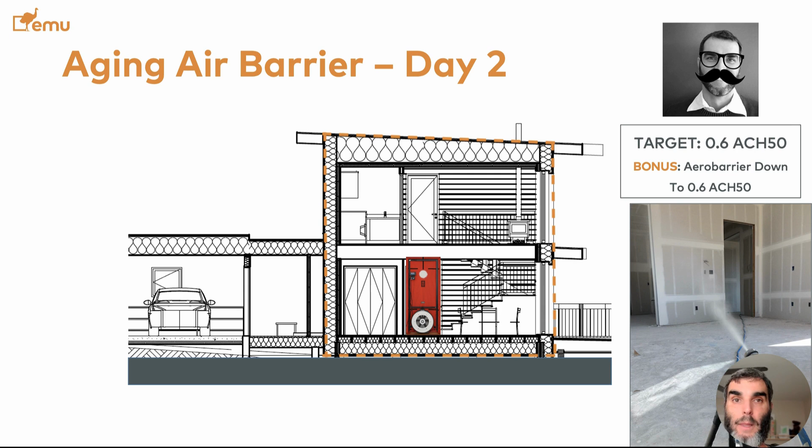Looking at day 2 and the aging of the air barrier, Enrique had chosen the AeroBarrier, so the nebulized caulking agent sprayed in the building to get down to 0.6 air changes per hour. And keep in mind that Enrique planned on the drywall at the walls as well as the ceiling to be the primary air barrier. So we're going to see how that ages.

Enrique hit 0.6, but once you start removing all the masking that is necessary for the AeroBarrier operation to be executed, he jumps up from 0.6 to 0.95. This is something that we have seen consistently in a couple of projects where we had AeroBarrier done. And in those projects, AeroBarrier did the job because the project had to go down below 0.6 and they could no longer get down to 0.6. But we saw numbers climb.

AeroBarrier had a certificate saying, oh, it's 0.13 ACH50, but actually once you removed all of the masking that they used to protect windows and all the other stuff, it went back up from 0.13 to 0.49. So a significant jump back up in the air leakage, just because AeroBarrier does not go over windows, it cannot go over HVAC equipment, so there's leaks there too.

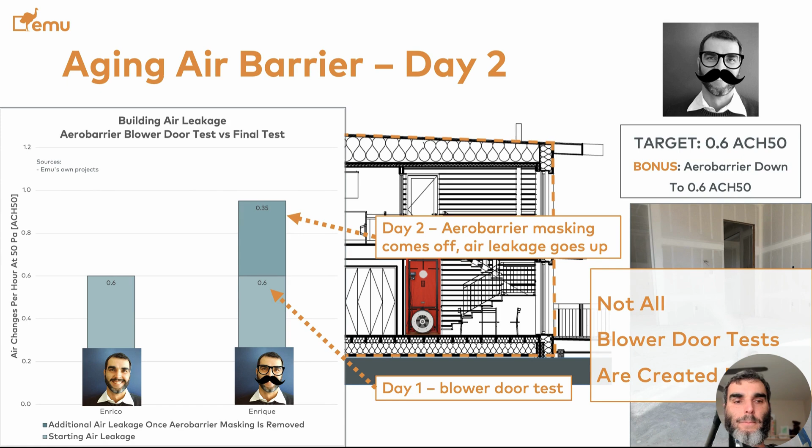Then looking at 13 years past, people live in the house, start poking holes through the drywall. So how does that perform compared to the original 0.6? So Enrico had the air barrier, the slab being the vapor barrier, taped with all seams and penetrations, had the sheathing of the wall as the air barrier, and had the smart vapor retardant at the ceiling. And over time, we can expect that to become a little bit more leaky.

As opposed to Enrique, who had chosen to use drywall at the walls and at the ceiling to be the air barrier, and it's a lot more exposed to cracking just naturally with the building settling, as well as the users poking holes through it. And so the increase in air leakage can be expected to be much higher. Specifically, it's about five times higher because drywall is a lot more exposed.

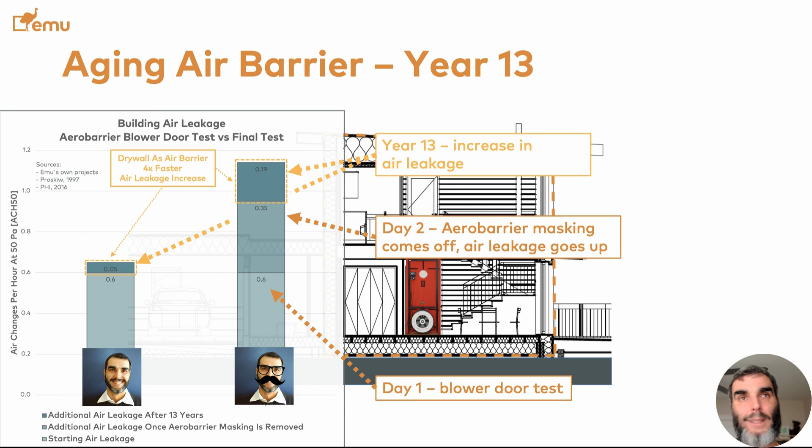And yeah, over 13 years, in a building that depends on drywall as the air barrier, the air leaks can be expected to increase 4 times faster compared to a building where the air barrier is protected, as in the case we have here with Enrico's project.

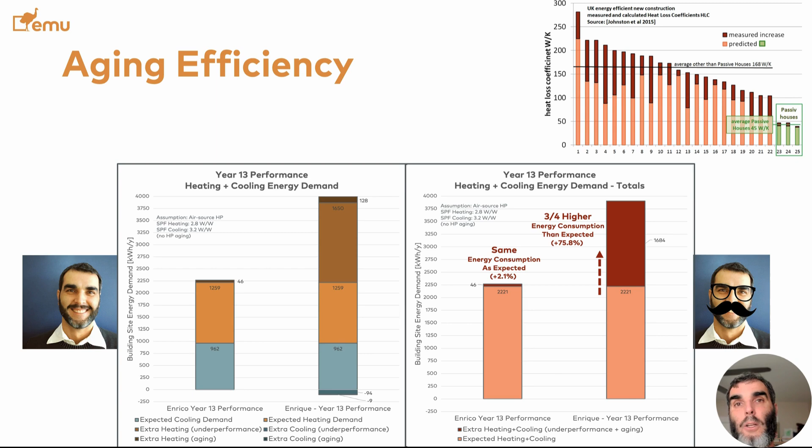Aging efficiency. So after 13 years, we can expect a 2% increase in heating and cooling for Enrico's project, just because of the project aging, the air leakage being a little bit higher, the loss of the gas in the glass unit being a little bit higher. But 2% over 13 years is very little in terms of increase, as opposed to Enrique's aging performance, as well as the initial performance gap, which can be almost twice the energy consumption that their client was expecting.

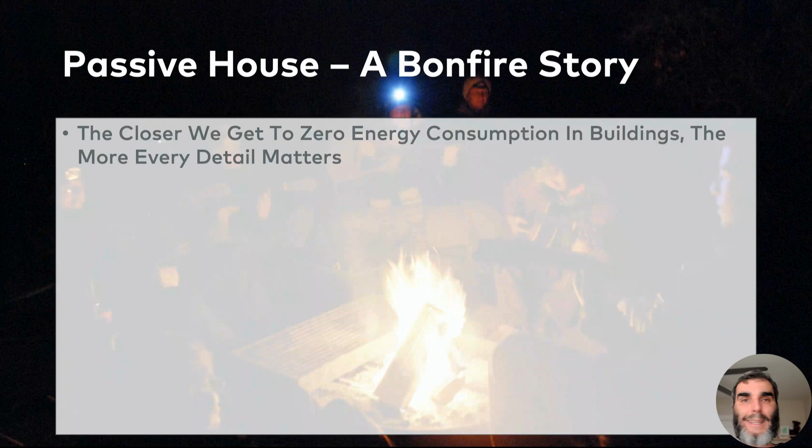So to conclude, the closer we get to zero energy consumption in buildings, the more every detail matters. Whatever the project goals, performance-based energy analysis allows you to optimize resources and make informed decisions. Whichever decision you may make, if you have the data, then you can be informed and use that handrail to make your own decisions. Then in high performance buildings, prescriptive approaches end up being more expensive and wasteful compared to a performance-based approach. I have a QR code at the end of this presentation to show just that.

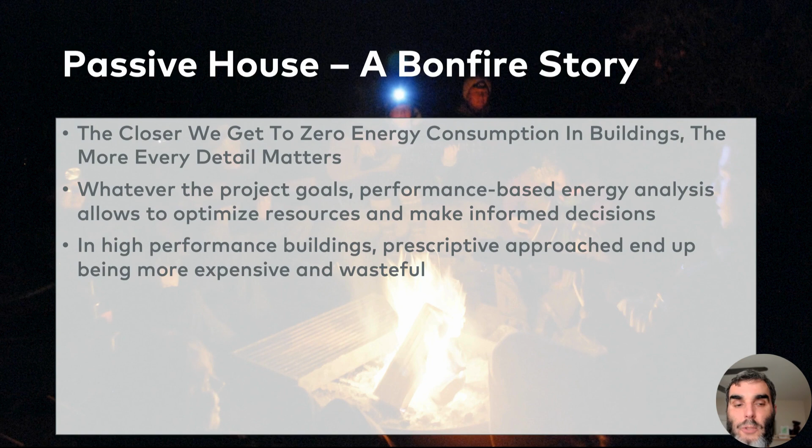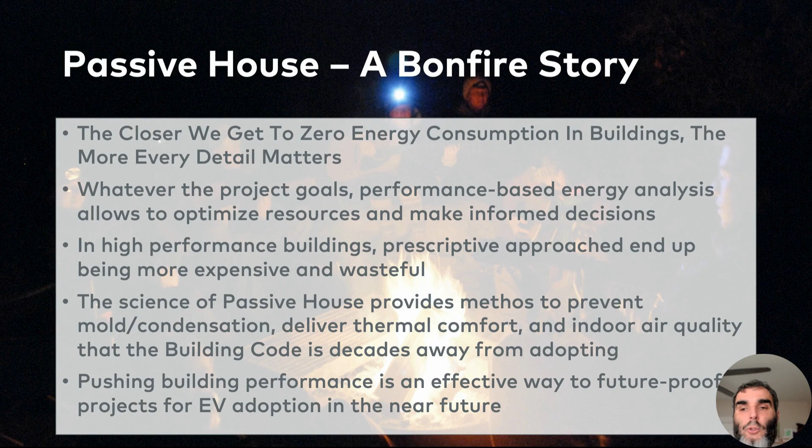And then the science of passive house provides methods to prevent mold and condensation, deliver thermal comfort and indoor air quality, that the regular building codes are decades away from adopting and enforcing. And lastly, pushing building performance is an effective way to future-proof projects for the time when EVs are going to be more widely adopted.